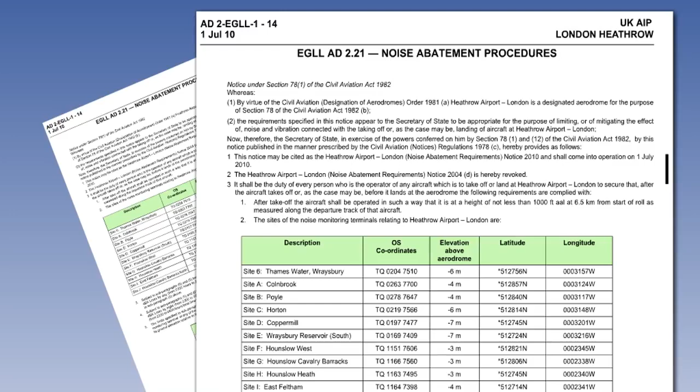On a point of terminology, it is worth mentioning that the expression noise amelioration, from the Latin for better, is increasingly being used. However, since the UK AIP still uses abatement at the time of writing, we will go along with that. The procedures will consist of any or all of the following elements.

First, the use of noise preferential runways. Secondly, the use of noise preferential routes. And thirdly, the use of noise abatement takeoff and climb or approach procedures.

In addition to these airfield-related procedures, each aircraft type will have its own procedure, devised by the operators and manufacturer and agreed by the state authority. These will include performance-related power reduction and flap retraction heights and speeds, maximum body angles, or climb attitudes.

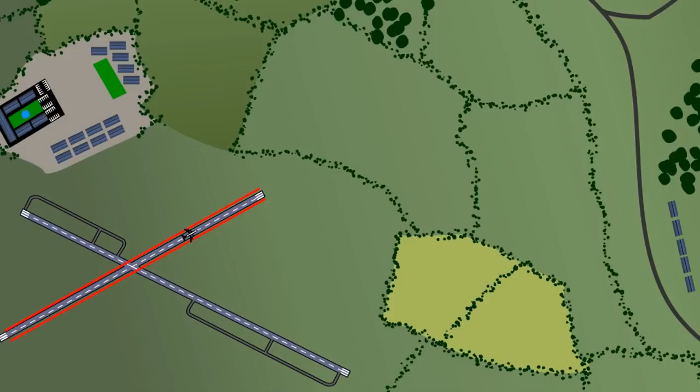Noise preferential runway procedures involve the use of specified takeoff or landing directions which are nominated to avoid noise-sensitive areas. Runways will not normally be chosen for landing unless they have suitable glide path guidance, usually an ILS, for use in poor weather, and precision approach path indicators, or PAPIs, in visual conditions.

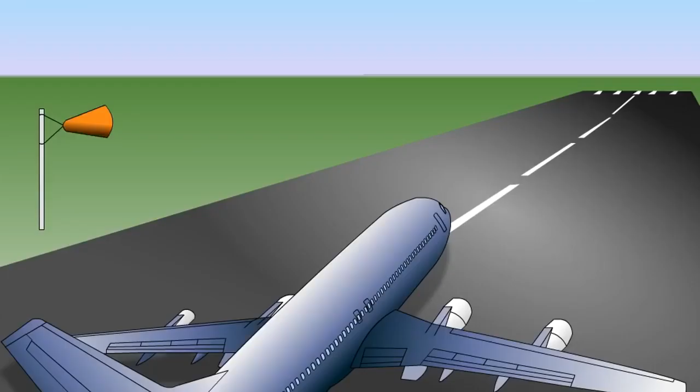There are certain conditions under which a noise preferential runway will not be selected, namely, if the runway surface is contaminated by snow, slush, ice or water, if the crosswind or tailwind components, including gusts, exceed 15 or 5 knots respectively, when wind shear is reported or forecast, or thunderstorms are expected to affect the area, or when the visibility is less than 1900 meters, or the cloud base for landing is lower than 500 feet.

Noise preferential routes are established to ensure that departing and arriving aircraft avoid flying over noise-sensitive areas near airfields as much as possible. There are strict parameters which apply to the use of turns in noise preferential routes, principally to avoid manoeuvres which could be hazardous close to the ground.

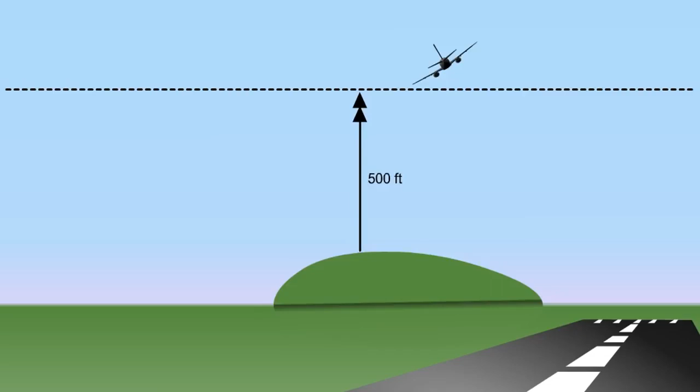Therefore, noise preferential routes will not include a turn below an aircraft height of 500 feet or 150 meters above ground or obstacles throughout the turn. Aircraft would not have to exceed 15 degrees of bank, unless there is provision in the procedure for acceleration, which would allow for an increase in bank angle.

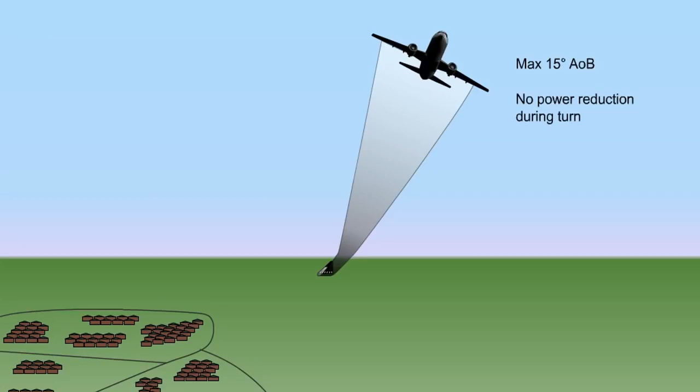Turns would not be required to be made at the same time as a noise abatement power reduction.

There must be adequate navigational guidance to allow pilots to follow the route as published. This guidance would normally be from VOR DME radio beacons in the form of bearings and distances, but could include radar monitoring.

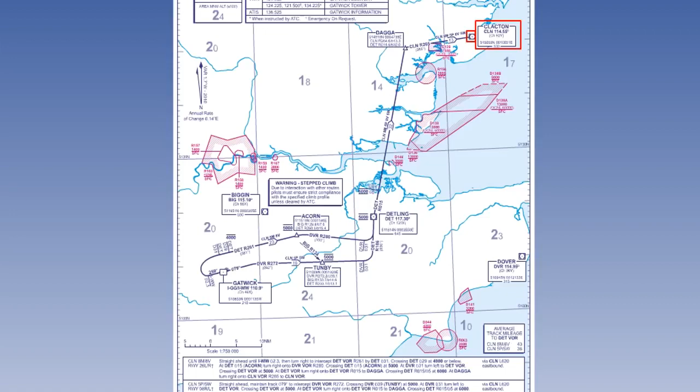The noise abatement regulations for turns after takeoff and obstacle clearance, laid down in PANS OPS Volume 2, permit turns at 400 feet or 120 meters, with terrain clearance of at least 300 feet or 90 meters.

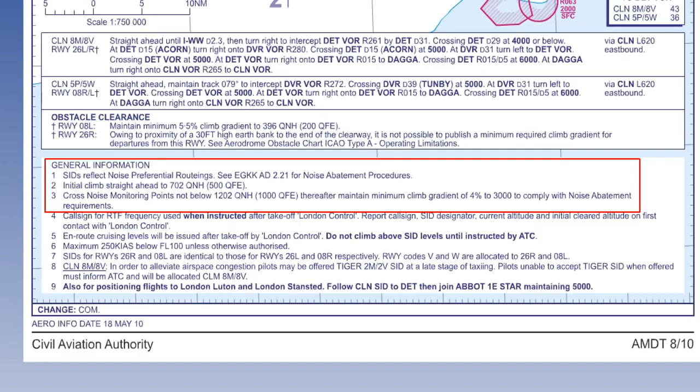The safety criteria of standard departure and standard arrival routes concerning climb gradients and obstacle clearance will be taken into consideration when the preferential routes are established, and aircraft will not be diverted from their assigned route unless either it is at an altitude above the upper noise abatement limit, or a deviation is essential for safety reasons.

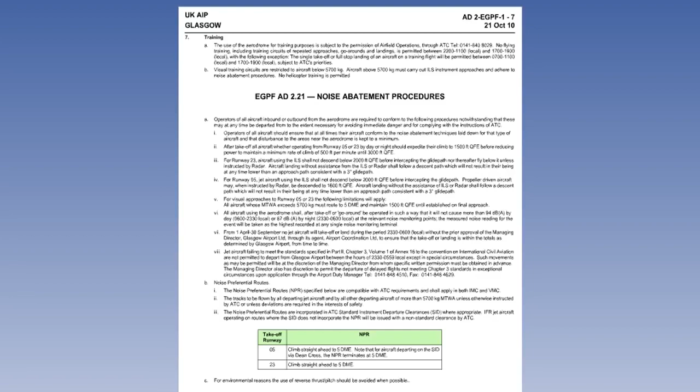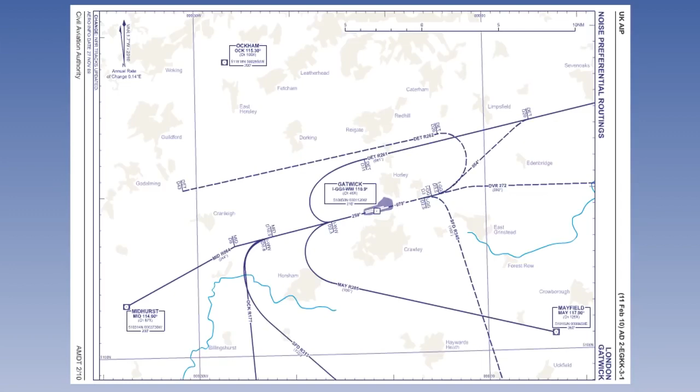In designing the routes, aerodrome operators have to specify the noise abatement objectives, but it is the aviation authority of the state in which the airfield is located who are responsible for ensuring that they do so. Likewise, the state of an aircraft operator is responsible for the approval of any associated safe flight procedures developed by the operator.

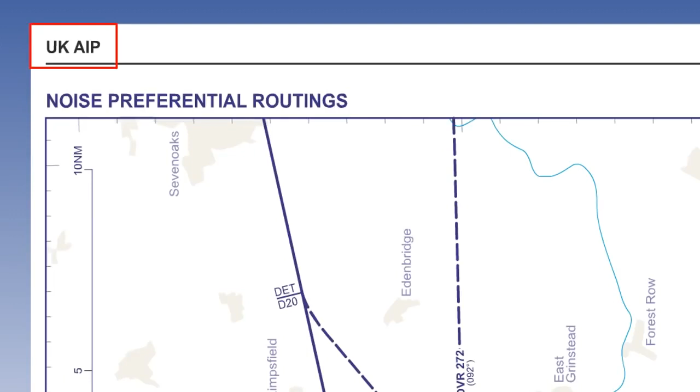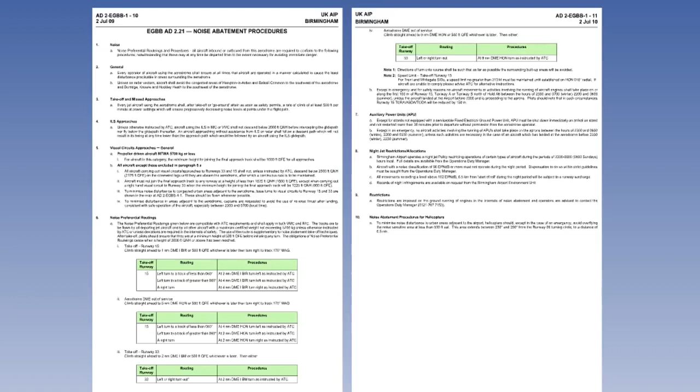Where noise abatement procedures exist, they will only be used if there is some benefit to be expected. Notwithstanding this limitation, a pilot in command has the authority to decide not to carry out a procedure if he feels it would not be safe to do so.

Also, procedures involving reduced power takeoffs should not be used in the adverse weather conditions previously described in the section on noise preferential runways, namely runway contamination, crosswind, tailwind, wind shear, thunderstorms, and poor visibility or low cloud base.

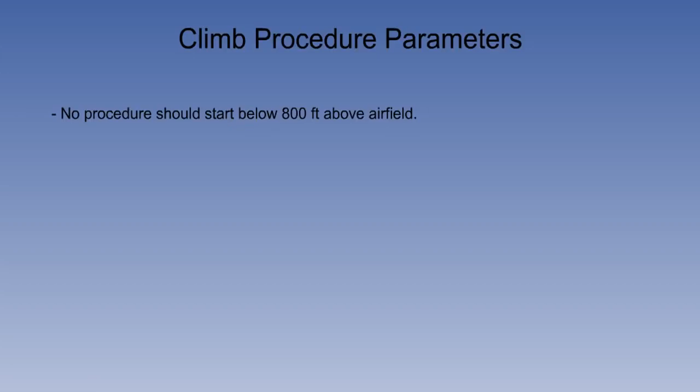Noise abatement climb procedures are planned according to a number of parameters. The first and basic one is that no procedure should start below 800 feet, or 240 meters above the airfield. Where an operator specifies a particular procedure for an aircraft, it will apply to all aerodromes. There can be no more than 2 climb procedures for any aircraft type.

That is, one normal and one for noise abatement. A rider to any procedure is that, in the event of engine failure, power settings can be whatever is required by the pilot, and noise abatement considerations no longer apply.

For noise abatement, the minimum thrust for the climb, with flaps and slats deployed, will be the lesser of maximum climb power and that required to maintain the engine out net climb gradient. The thrust levels for various conditions and configurations would be found in the operations manual, and take account of the use, when appropriate, of engine anti-icing, which reduces engine power.

All procedures must comply with the normal minimum climb gradient based on the obstacle data, all of which will be available to the operator, but the procedure should not demand a body angle or pitch attitude that exceeds the aircraft's acceptable maximum.

Having looked at these parameters, you will be shown in the next scene how they are applied to 2 typical climb profiles.

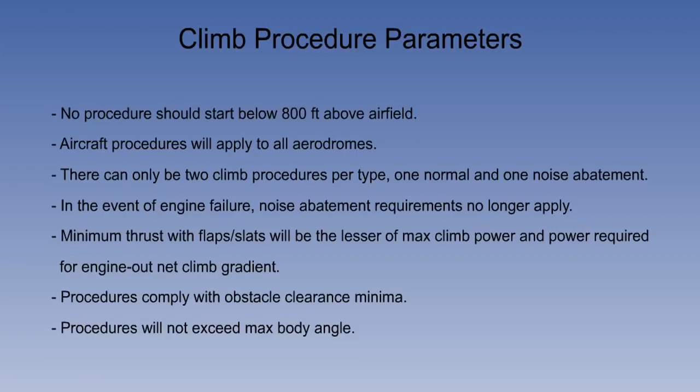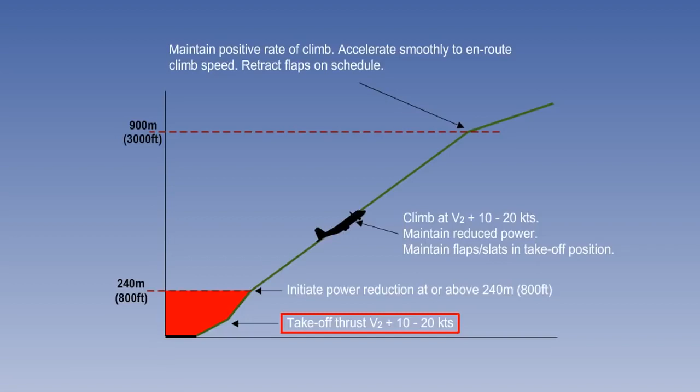The diagram shown on the screen shows a typical noise abatement profile in which the aim is to alleviate noise close to the aerodrome. After takeoff, the aircraft accelerates to V2, plus a safety margin of 10 to 20 knots, and climbs to 800 feet above the airfield. V2 is takeoff safety speed, the speed above which the aircraft is controllable in the event of an engine failure. The extra speed keeps the body angle below maximum, while still enabling a good rate and angle of climb.

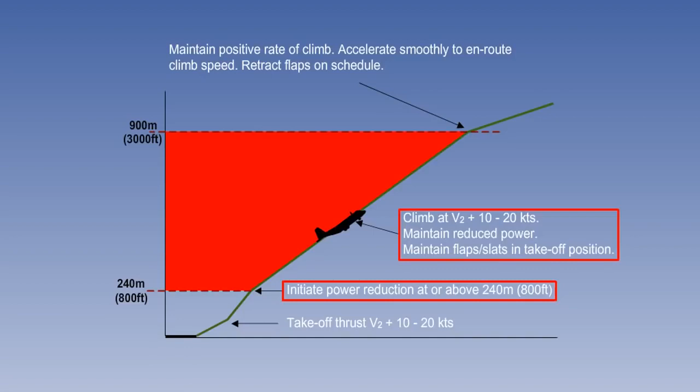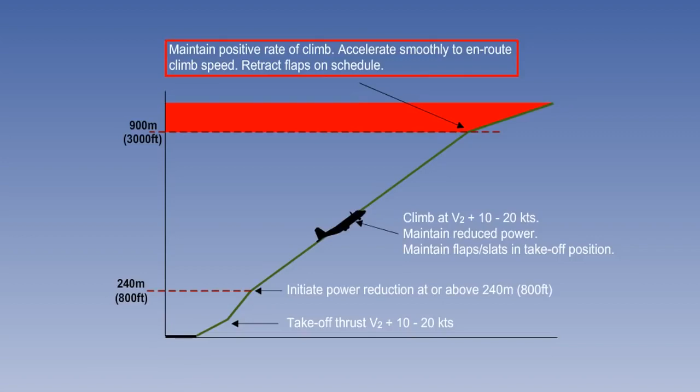At or above 800 feet, power will be reduced to the noise abatement setting, but flaps and slats will be left in the takeoff position to maintain the extra lift, with speed maintained at V2 plus 10 to 20 knots. Above 3,000 feet, the aircraft continues the climb and accelerates to en route climb speed, retracting flaps and slats at the appropriate speeds. The second profile shows a climb intended to alleviate noise distant from the aerodrome.

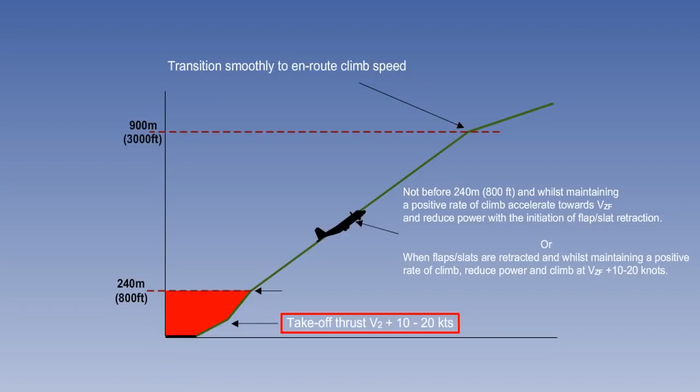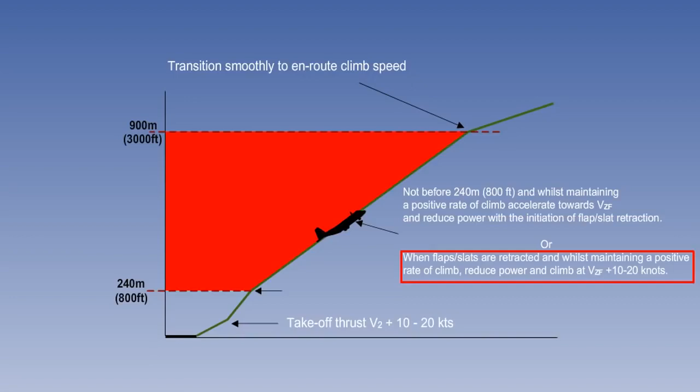The first segment to 800 feet is identical to that of the first profile. In the second segment, either the aircraft climbs, accelerating towards VZF, minimum speed with 0 flap, and reducing power as flaps are retracted, or alternatively retracts the flaps and then continues the climb, reducing power and climbing at VZF plus 10 to 20 knots. Above 3,000 feet, the aircraft would then accelerate to its en route climb speed.

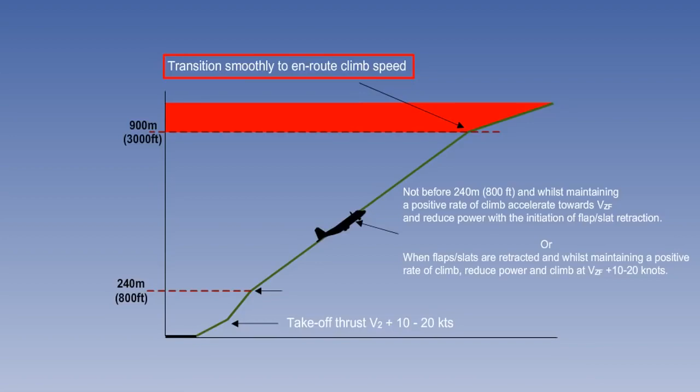For noise abatement approach procedures, 2 basic parameters are applied, namely that the aircraft will be in the landing configuration from the earlier of 5 nautical miles from the runway threshold or the ILS outer marker, and that no excessive rates of descent will be required.

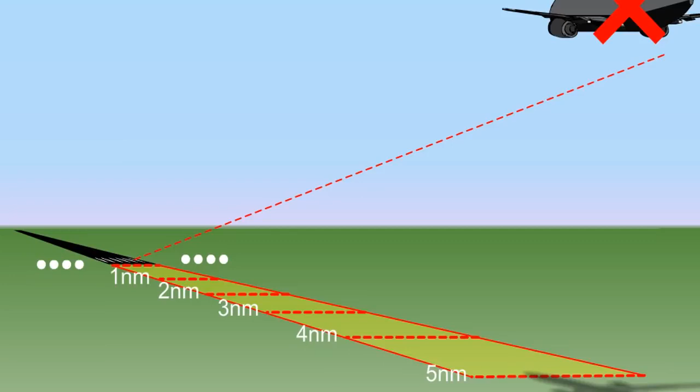There are several safety considerations to be taken into account regarding glide path angle, which should not be above the ILS or Precision Approach Radar, or PAR, glide path, above the PAPI visual glide path, or above 3 degrees, unless the ILS glide path is higher. Note that the PAR talkdown mentioned in these restrictions is available in the UK only at certain military airfields.

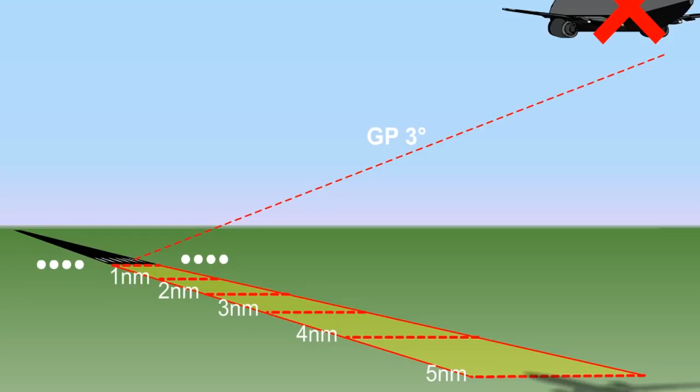Noise abatement restrictions should not require a turn onto final approach at a distance less than that which, on a visual approach, would allow an adequately stabilised descent to the threshold. For an instrument approach, the aircraft should be established on the final approach track before intercepting the glide path.

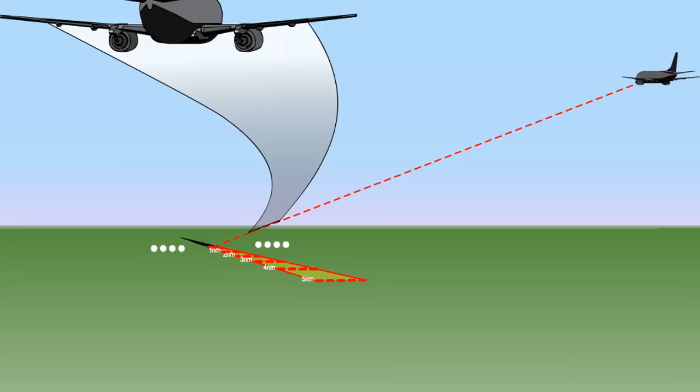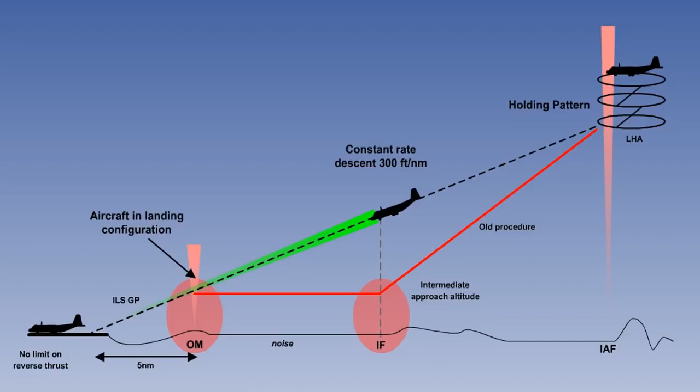This type of technique not only reduces the noise footprint of the aircraft, as it requires a more constant and lower power at higher altitudes until intercepting the final 5 miles or so of the approach, but also has the benefit of saving a fair amount of fuel over a period of time.

For landing, noise abatement procedures do not prevent the use of reverse thrust and reverse pitch, although individual local procedures may request the minimum use of reverse. Also, displaced landing thresholds should only be used for noise abatement if aircraft performance requirements can be met on the reduced runway length.

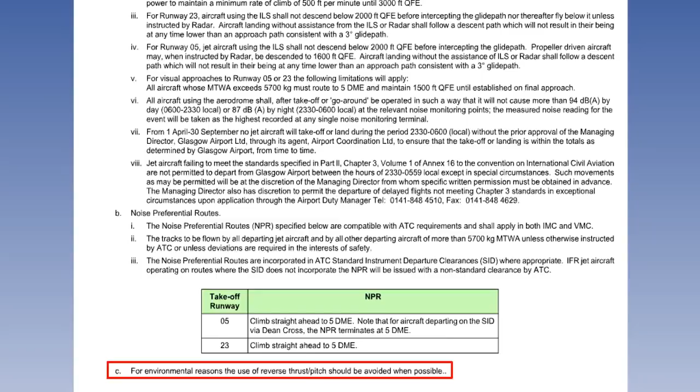Noise abatement procedures are designed to minimize the impact of aircraft noise on areas surrounding airfields, but safety is always of paramount importance. Although the procedure parameters are laid down with this in mind, a pilot in command always has the authority to discontinue a noise abatement procedure, to follow an alternate normal one, or use whatever power settings he deems fit, if he feels that safety considerations so dictate.